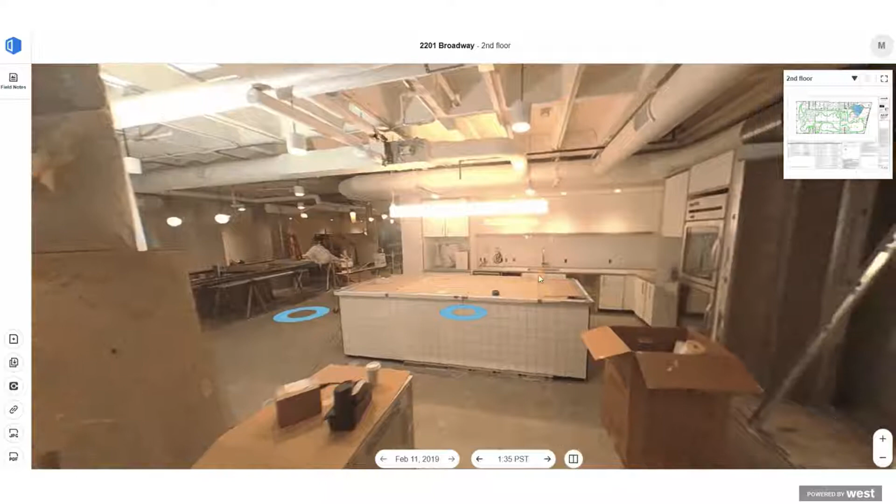So here's a GIF just to show some of the benefits of this workflow. You can see that we're comparing photos from the past, and it's a pretty powerful image seeing how much progress was made just with this one quick GIF. You can see that we can immediately jump to a location on our floor plan and get a powerful image of some of the progress we've made.

Hey, thanks, Maddie. This is Jeevan. So really quickly, you just saw a quick snapshot of what the interface looks like on your computer or on your phone. Real quick, how do you get those images?

With OpenSpace, we again focused on simplicity and ease of use. So here's how it works. You take an off-the-shelf 360 camera, the kind you can get at Best Buy or Amazon, and pop it onto a hard hat. You can pop it on and off just with a magnetic mount. And then our platform provides a phone application. You hit go, pretty much, and you walk the job like you normally would as part of your normal workflows.

You upload that data to our cloud, and that's where our magic happens. We have a bunch of computer vision technology that's based a lot on self-driving car tech. Basically, by taking that dumb video file from the camera, we can identify exactly where each image was taken while you're doing that walk and automatically pin it to the floor plan. We are pretty proud of this work. We patented it and everything.

Once we do that, we make that data available to you on any device that you have. You can also take notes, either text notes or close-up images with your smartphone while you're on a walk, and those images also get automatically pinned to the floor plan. So you both get the broad, complete Google Street View style output of your job and specific context images that are not lost or disorganized, but pinned in context.

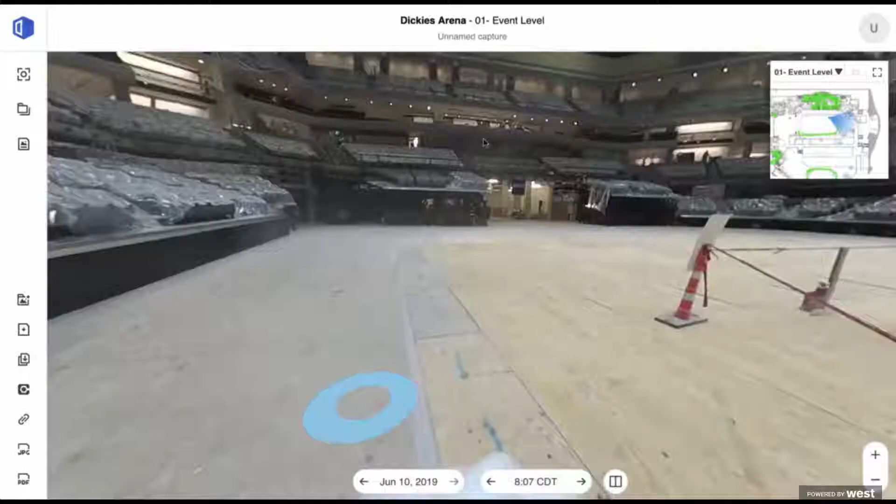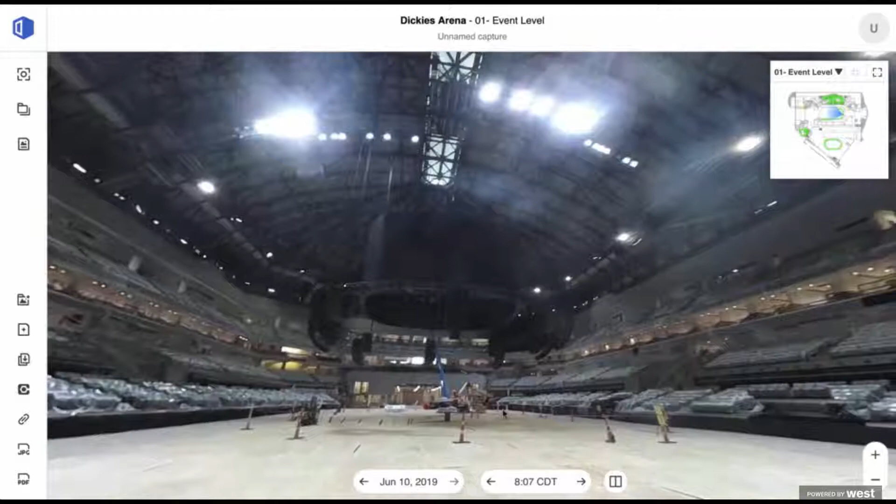So what we wanted to do next was show you what this looks like in action. This is a project we were working on in the Dallas-Fort Worth area - a new arena project called Dickies Arena that will be the marquee arena for Fort Worth. The challenges we ran into: this is a really large project, and documenting it well and consistently was a big challenge at the beginning of the job.

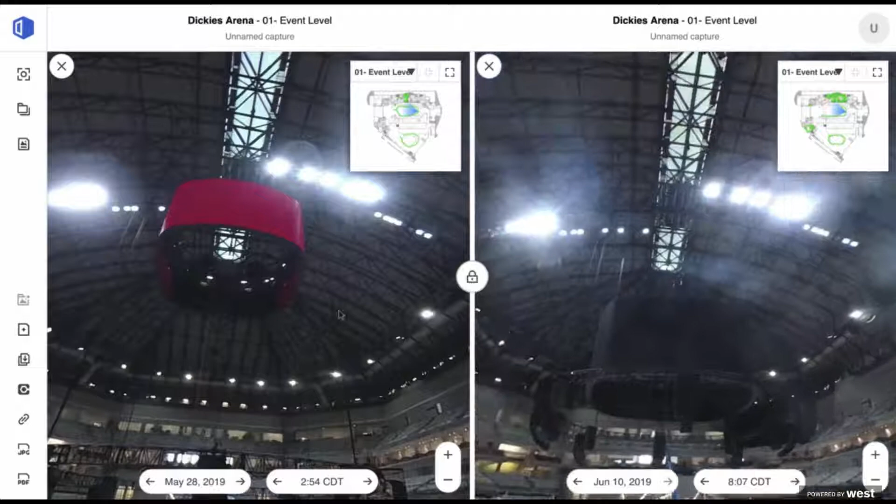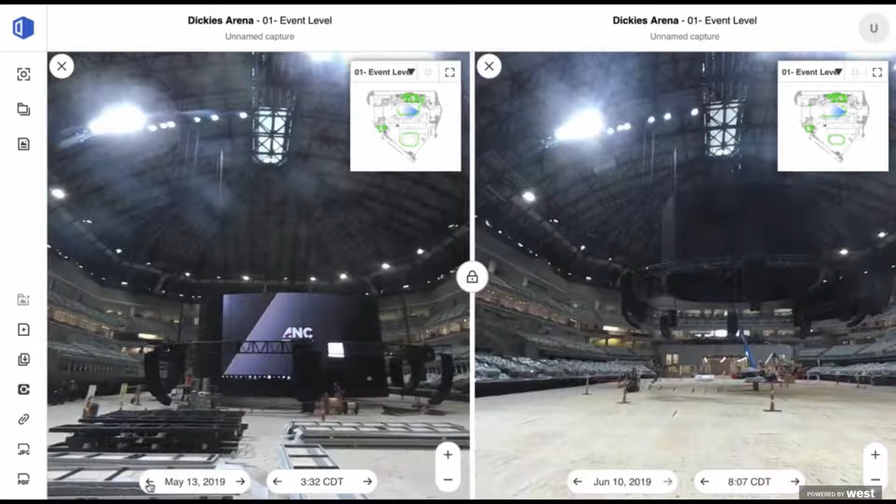What we're showing here is some of the content actually pulled from this project. What's exciting is that at the beginning of this job, we were really struggling to find a solution that could keep up with our need and demand to document this project. Now we're capturing this job on a weekly basis, which we never would have imagined possible at the beginning.

You're seeing here some of the features Maddie talked about earlier - the side-by-side comparison, our ability to do the Google Street View walk that many of us are familiar with on a normal Google Maps browser. But some of the other features OpenSpace continues to put out are highlighted on the left-hand side.

We really do feel like this is a collaborative space for all of our project team, both on site and those who are not, to come into. One thing I really like that's popped up here is the ability to take a single shot from the capture.

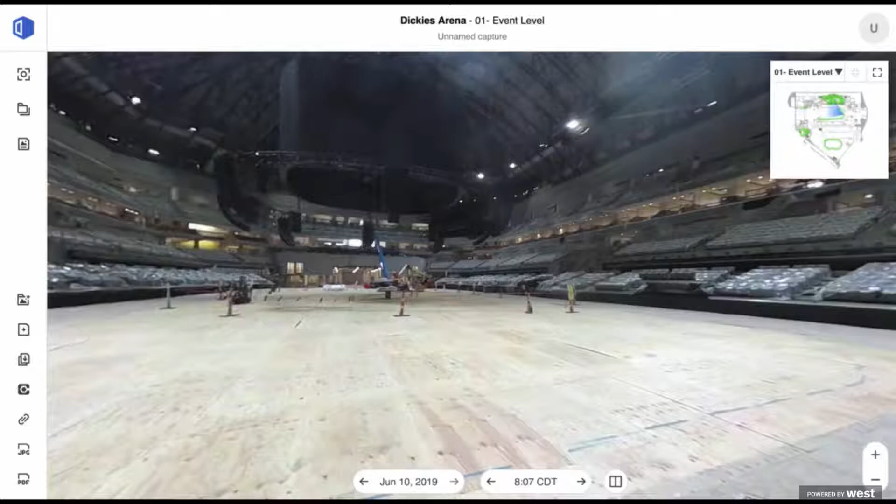This is a great way to really show and share with someone specifically something you might be looking at from a job walk. It gives context of what's going on - where it's at in space and the direction it's looking. You can add a note here and mark it up in a different software platform to better explain what's going on.

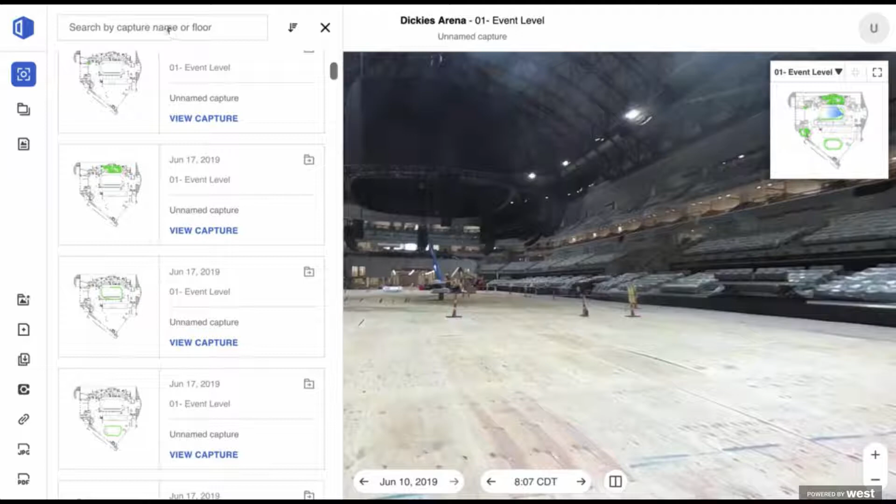This capture list is a really good way to keep us all organized when we're doing these captures. We can search for them by different levels and go through the different spaces we want to look at more specifically. It's just a really simple and intuitive dashboard.

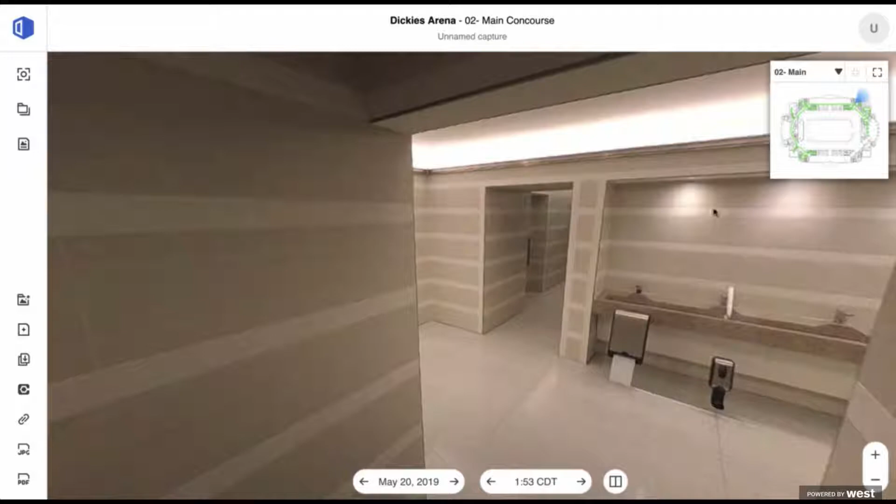With the software exhaustion that some of our project teams have been exposed to, this has been a really refreshing way for our project teams to have a very low barrier of entry from a training standpoint. It's been really neat to see how much they've taken on using this platform in the short amount of time the onboarding process took, and how they've improved those other workflows we've gotten to see.

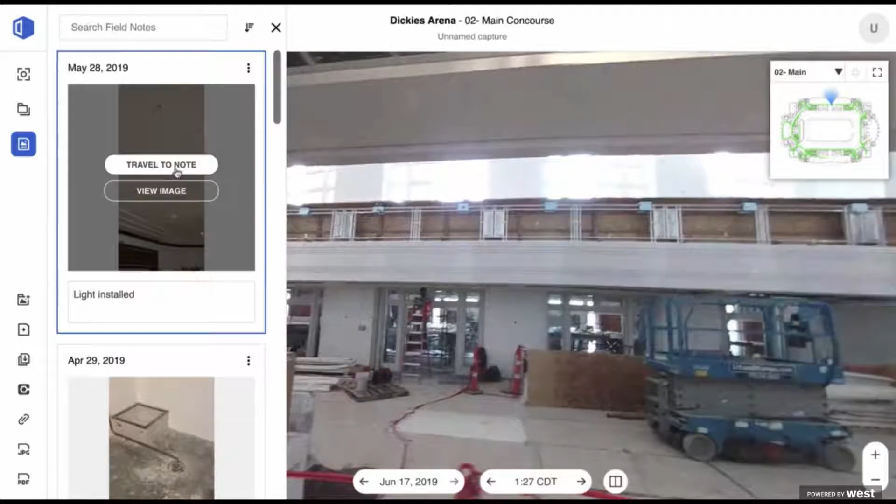Field notes is one of those other things. The ability to capture high resolution photos is really helpful as you're walking along and see something you may want to note. You can capture that with your phone and it'll automatically tag that in the site walk, which is a really nice feature to have available for them.

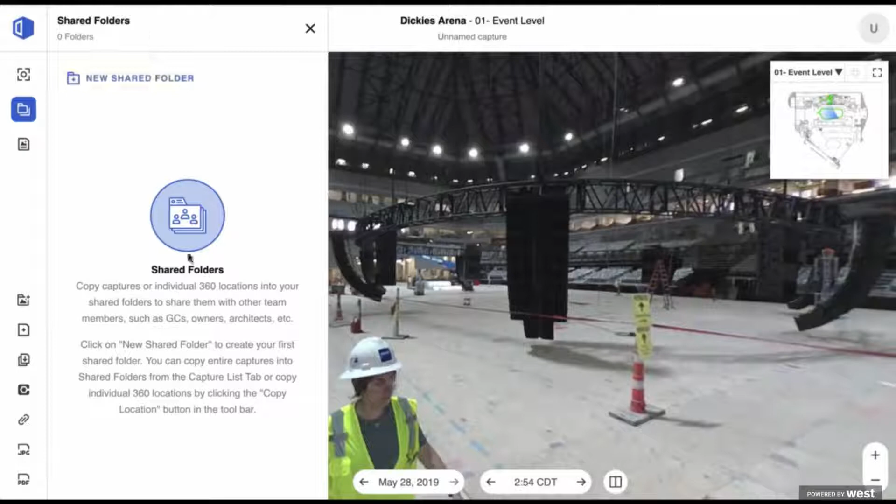Another thing we wanted to talk about is this ability to share progress with the owner, which is an improved workflow we've really seen. What's nice about this is a new feature called shared folders, which gives us the ability to create different content-specific folders for different people who we want to keep updated. The value is giving a limited view on different items that clients, subcontractors, or contractors on the project may be more interested in.

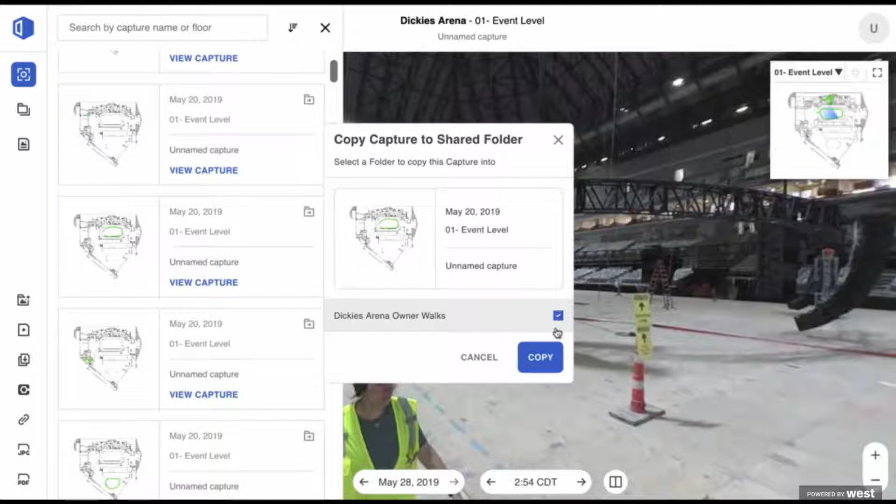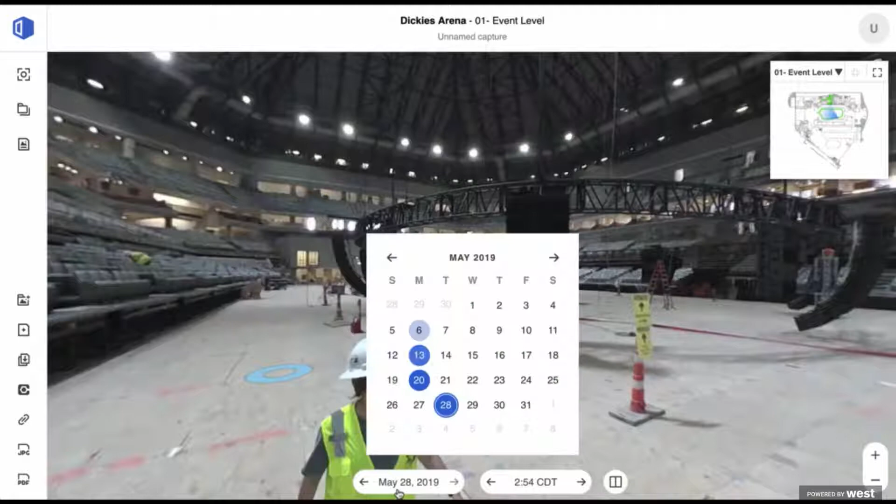What's nice is you can specifically select certain walks that get uploaded to that folder for someone to be subscribed to, and also do different things about specific views within that capture. So if you only want to look at a specific area, in this case the concourse floor or main floor, you can go back to different walks and see that progress and change over time.

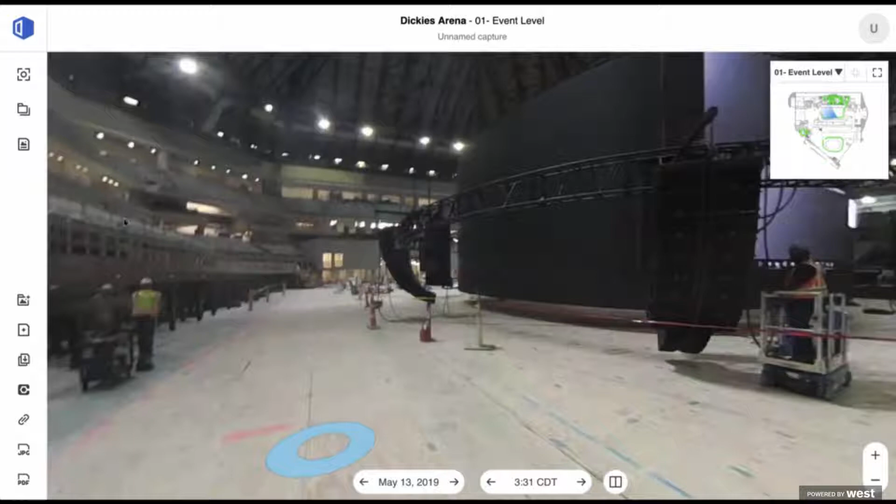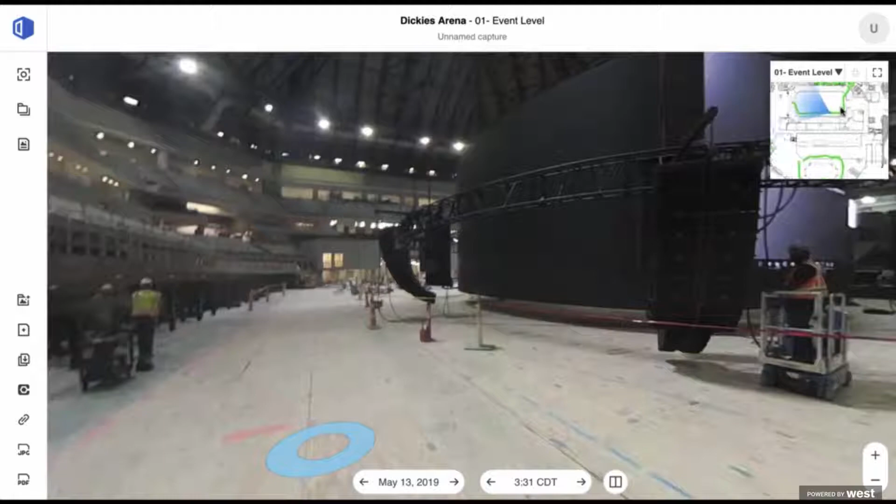It's helpful that you can either save the entire walk if someone's curious about a certain area of the job, or just save a specific view, which is what we're showing here. It's a really handy feature that will enable us to hone in more on clients and collaborators in these projects, making sure they feel even more cared for regarding their most important items. We wanted to show a preview of what that looks like for those who want to see things more specifically.

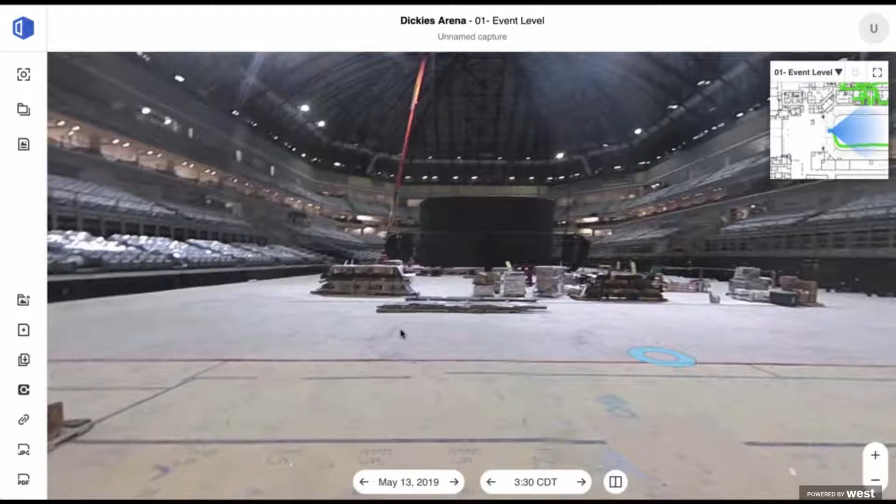I've done a lot of different technology training for different software and hardware platforms, and by far this was one of the simplest tools I've ever trained on. It was fun to give them a brief intro within the job site office and then have them hit the ground running out in the field. On the job site level, anyone can go out and do the capture, but what we found most successful is having someone do it on a more frequent basis, or the same consistent person. One thing we tried to do is map out where our walk is going to be.

The intention is to make sure we're capturing an area in a consistent manner. We have a team of about 3 or 4 people on this job who know the route and know the different areas of interest, which change over time with different finishes being completed. That core team could be anywhere from a project engineer to a superintendent or safety staff actually capturing that out on the job.

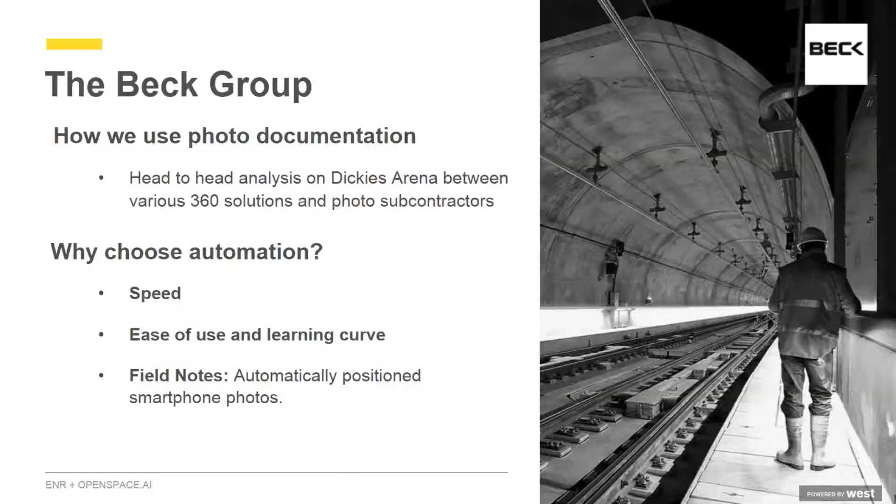The next felt need we see as a potential opportunity to improve is something I want to show you in a video. This will be rolled out soon, and we're excited as we've been testing it: really comparing the current state of the job site to the model.

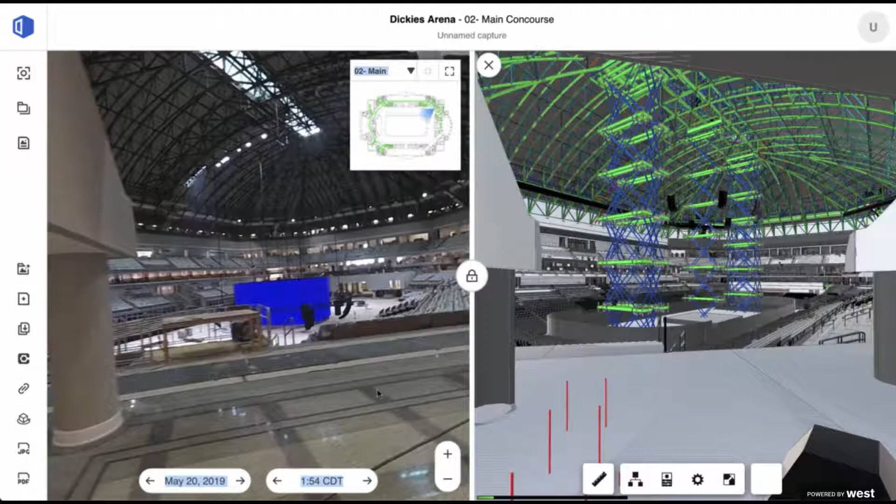The model gets a lot of time spent on it on the office side, especially during pre-construction, ensuring elements will be installed correctly. But oftentimes the model isn't used as effectively during the construction phase, so this helps check these elements and verify they're being installed correctly. This is a very heavy model, as you can imagine.

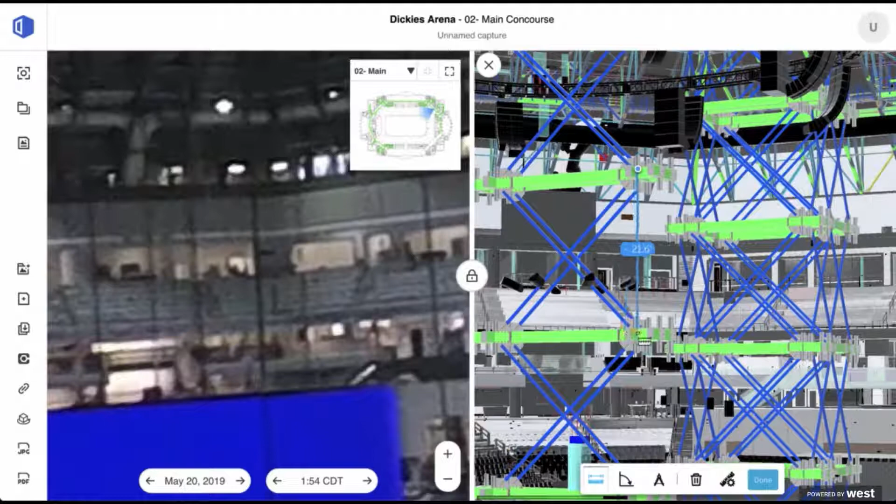This video you're seeing here is being viewed through a web browser, and you can see the speed at which things are being pulled up is really quick. The nice thing is you can do all sorts of things in the model that we're used to in different senses, whether at our computers or looking at it against job site documentation.

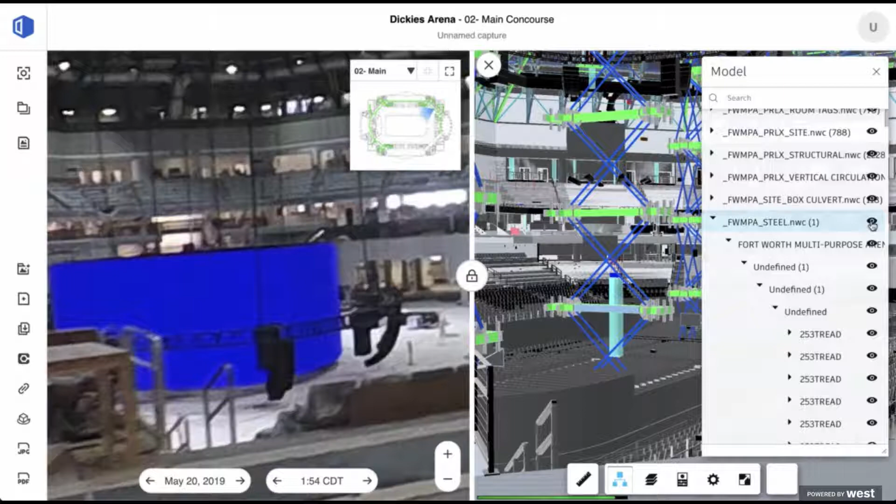Even having the model selection tree is a huge value add, which is what you're seeing here. Being able to turn different model elements on and off is a really handy feature, because you may want to see what the state of what you're looking at will look like in the future, but you also need to see what's behind it.

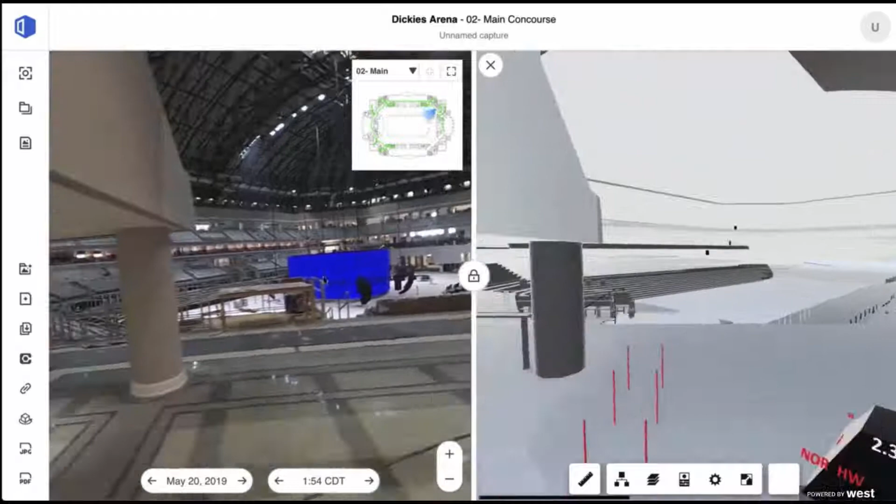In this example, we turned off some supporting roof structure—those towers—and then you can turn off these different generic models to get an idea of what the space may look like in the future. Similar to that Google Street View we're used to, the model will move with you side by side, which is really helpful.

Being able to take that on any level—so if you wanted to go down to the main event level, you can do that and start to move around and navigate. This is just, I think, truly going to take the model workflow even further.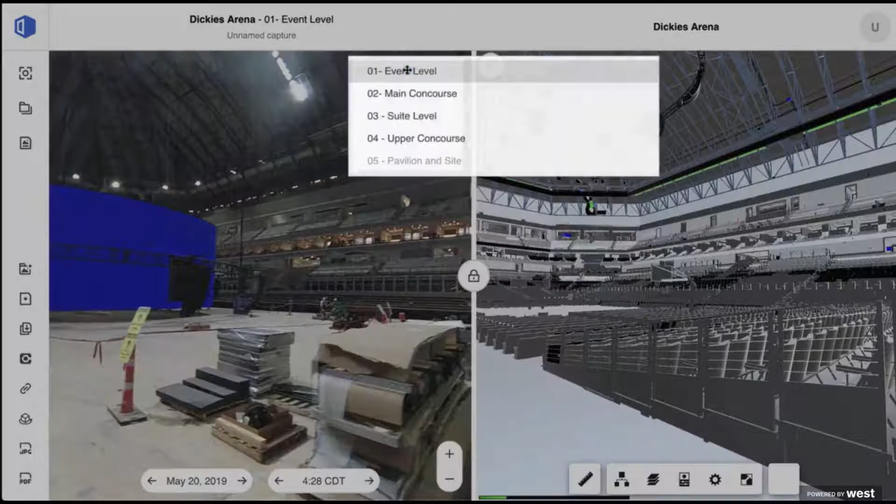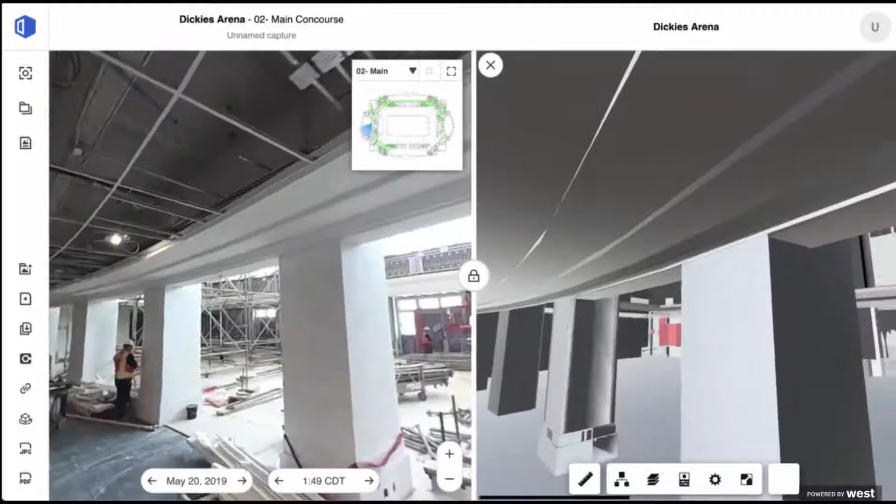We're always trying to find ways to get the model in front of our project staff in different and creative ways. The fact that they've already been using OpenSpace and getting familiar with that tool, and now have the opportunity to come into the model space and compare what it's going to look like, is really exciting.

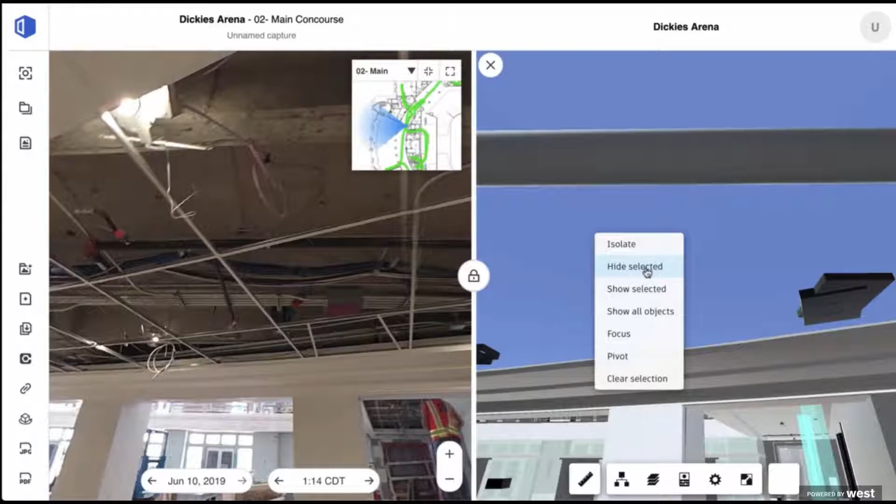In this example, there's a ceiling element that we'd want to turn off to see what's behind it. You could hide that element to truly see the different elements being installed and whether they're being installed correctly. This is just an example, and we could go through dozens of different places here, but we're really excited.

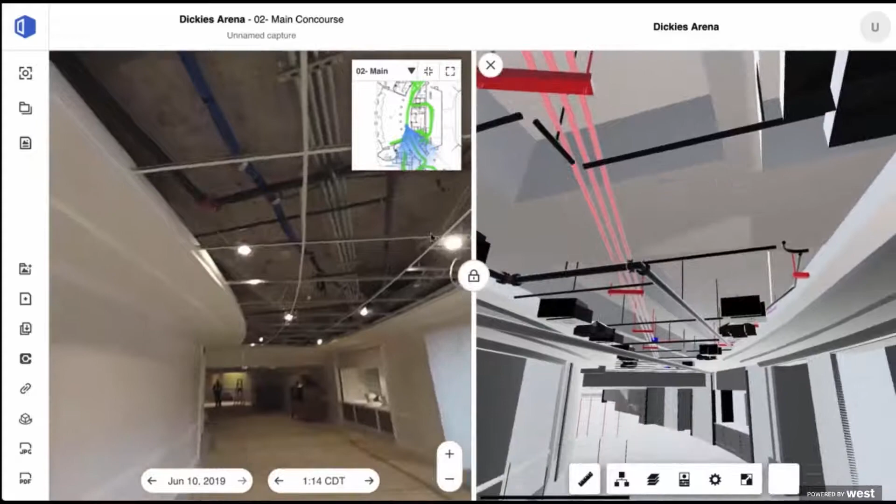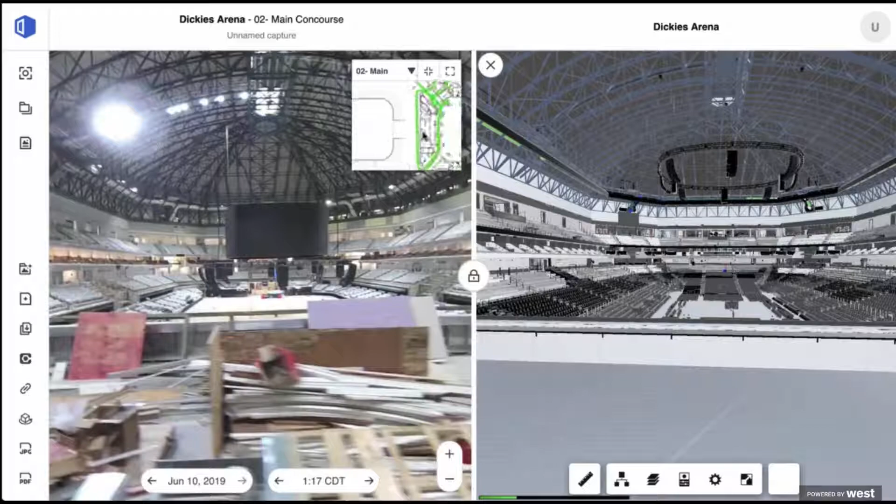I don't often use the word game changer, but this truly is a game changing thing for our field staff and project staff, enabling them to use this technology and compare it to a lot of the coordination work done in the office as well. So with that, I'll pass it off to Procore to talk a bit about some of the integrations they're building.

Awesome, thanks. Jeevan, were you going to go through the updates to the integration? Sure, yeah, I'm happy to do that.

Real quick on what Grant was just talking about with the BIM integration, we want to thank our friends at Autodesk for helping make this a reality. And like Grant mentioned, it's the full model, and that's a big one—800 megs or something like that, Grant. It's a big model, so those aren't just snapshots or pictures of the model. It's the real model.

You can access it as just how Grant showed, turn layers on and off, everything you'd want to do in a pretty easy, simple way. So we're pretty excited about that. It accepts lots of different types of file formats. So again, we wanted to make it powerful, but also really simple.

So I want to talk next a little bit about our continued integrations with ProCore. Now, we launched our first integration with ProCore last year, and this next wave is really focused on getting the data from the field into the workflows that people deal with every day. I'll talk about that a little bit here.

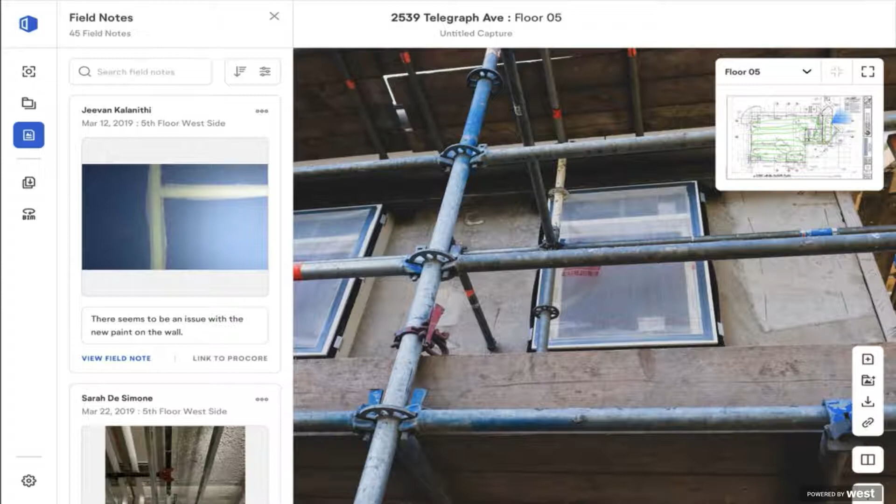So you can see in this image here, you have the job, you have some field notes there, and you see that link to ProCore in gray on one of those field notes off to the left-hand side there. What that lets you do is take that data and create things like RFIs or observations, or even link them to existing RFIs or observations that are in ProCore. And then you can fill out all the information that you would typically do in ProCore right here. And then you fire it off. Now it's in ProCore. So this is a really simple and easy way to get that data from the field into these workflows.

As a short anecdote, I was talking to a gentleman who works at ProCore, and he said something pretty interesting. He said, one of the things we do really well at ProCore is we capture the intent, what we're trying to do, what the teams are trying to do on the job. The drawings, all these things are the goals of the team. And what OpenSpace does, which is really special, is capture what is actually there. So we think this integration allows us to link those two things. We're pretty excited about it.

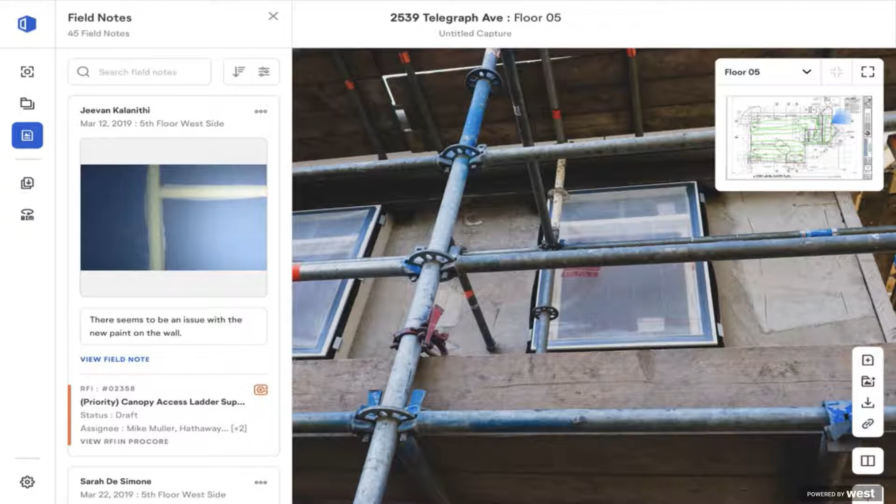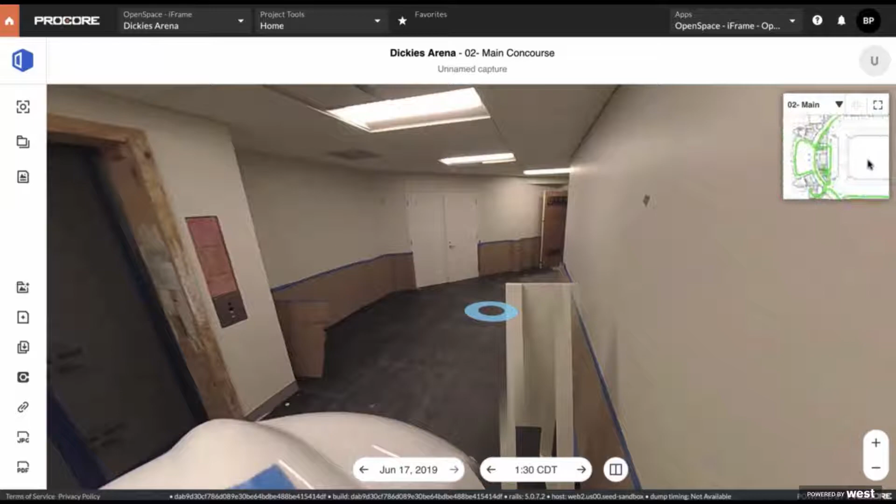And let me show you this other little video here, which allows you to access the full OpenSpace experience totally within ProCore. So what you're seeing here is, again, the OpenSpace environment, allowing you to see everything that's there. But as you'll notice at the top, you're still in ProCore. So it might sound like a simple thing, but not having to open up that tab really makes things easier. And of course, you can log into OpenSpace via your ProCore login. So we simplify that as well.

Integrations, of course, are really important. We don't want to exhaust people with lots of different tools to log into. And this is just one way of making these things easier and more seamless.

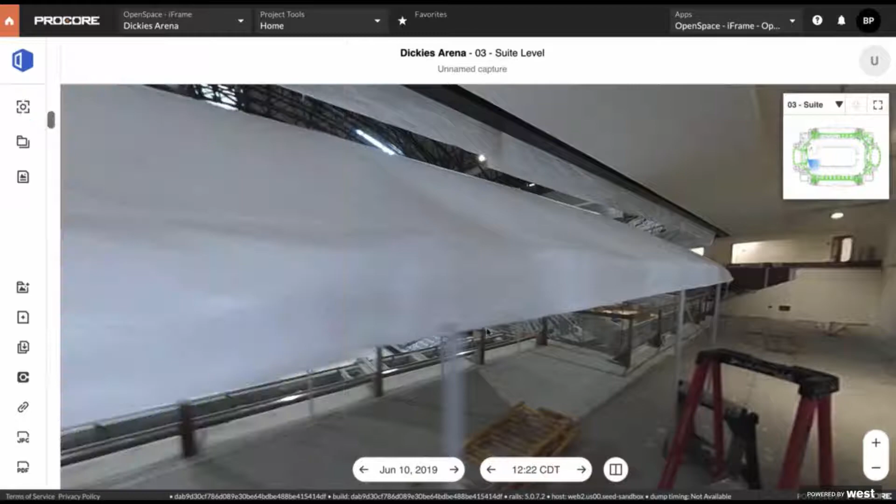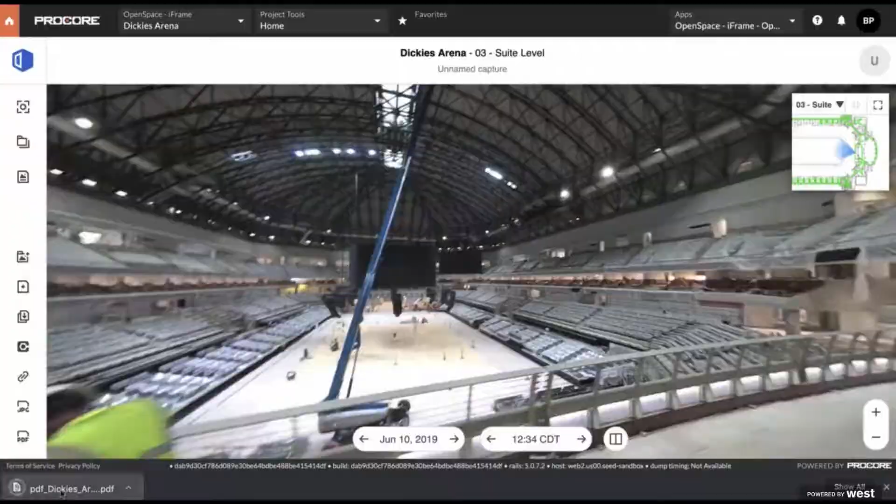One thing I'd love to add that's really exciting too, these were all ideas that we had kind of come up with from the beginning in using this platform. Beck Group's a pretty big Procore user and worked with them on other developments across different software platforms and their API. So we came to the table and said, how can we combine these two really powerful tools to start talking with each other? We got in touch with a lot of the development team at OpenSpace and said, hey, this could be a really powerful solution if these two systems talk to each other through observations and RFIs, and then even taking that a step further with the integration in the iFrame within Procore. Oftentimes, folks will kind of lose sight with getting logged in and different things like that. So we thought that was just a really neat and effective way to get more people into the documentation that we were using.

Awesome. And I guess we'll hand it over to Eric.

Yeah, thanks, guys. Appreciate the context, and we're really excited about the integration. Just wanted to give some background on Procore for those of you that are new to it and may not know what it's about. We're basically the largest cloud construction management platform used by subs, GCs, owners in a variety of ways, from pre-construction all the way through closeout. So folks like Beck Construction are using things like quality and safety and project management and construction financials to sort of run the backbone of their projects. And a pretty key part of our strategy is opening up all of these tools to partners like OpenSpace.

So it's exposing processes like RFIs and observations, and then all of the collaborators that are on that project. It's not just the tools, but all of the users and different subcontractors and different collaborators on that project that can then be also reflected in partner applications. So if there's one part that's really bringing the APIs together, the other would be partnering with the most innovative companies in the industry. We're really thrilled to be working with OpenSpace.